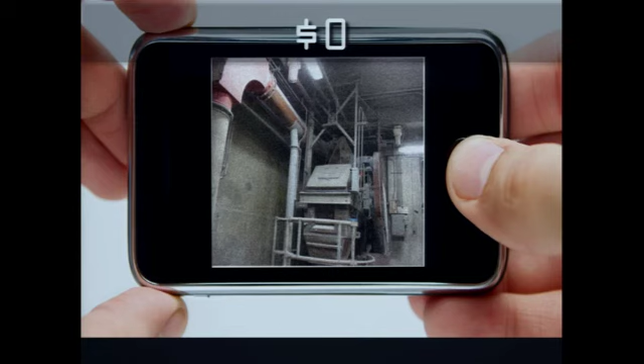This is interesting. This is a test we did on a mobile device, and most of you will think this is a photograph. Actually, no. This was point cloud data that we were able to generate from the phone, completely three-dimensional.

This is another one I captured with my iPhone. I was around Notre Dame and captured different angles, pictures of the church, and was able to render it automatically and have that kind of information.

So for us, that's what we call reality capture. Bringing things from physical to digital is very, very important for us.

We start seeing these devices because we wanted to go airborne, and make airborne very affordable. In fact, we built what we call UAS, drone systems. I took one of these drone systems to Africa, and we were flying over archaeological sites taking high-definition video.

And imagery, generating some topography from there, which was fascinating. You can see a clash of cultures, me wearing a traditional hat, and then we have this chief, a very nice guy, but he carried an AK-47 24 hours a day. So I was a little careful about that.

It was fascinating because every tribe we went to, we had to ask permission to fly this strange thing. This was one of the octocopters that we built.

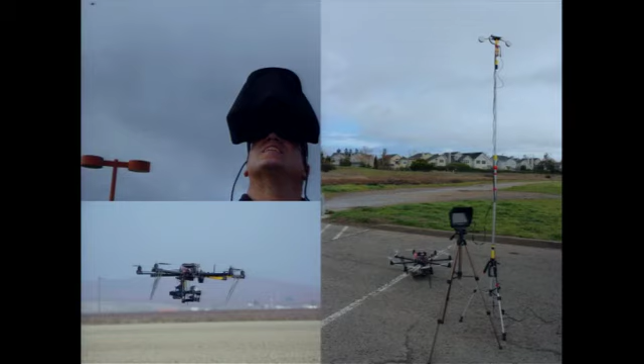We fly manually. We open a Google map, set up points, and send it on a mission to do the mission.

Or one of my favorite flights, what we call FPV, through these goggles that have full telemetry. I go to a distance of 1,000 meters, and I can capture and activate the octo to do whatever we want.

This is a flight path that I designed in front of our main building in Marin County. And it was interesting - from photographs, I was able to generate this geometry, completely three-dimensional.

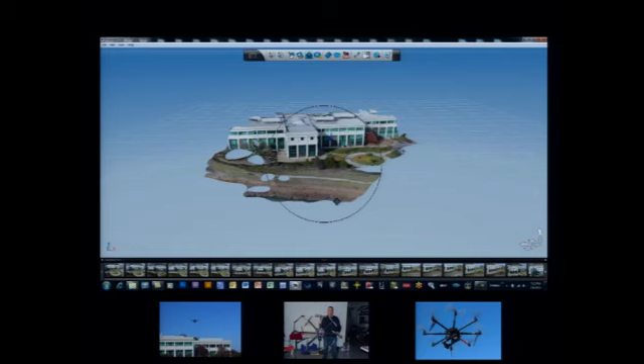Just from the images, I don't have to even tell the system where's the image. I just give it an array of images - in this case, 150 - and I say, from this array of images, compute me the three-dimensional model of this building itself.

But it goes beyond that. What we do with this data - how we analyze it, how we simulate the lighting, the air distribution.

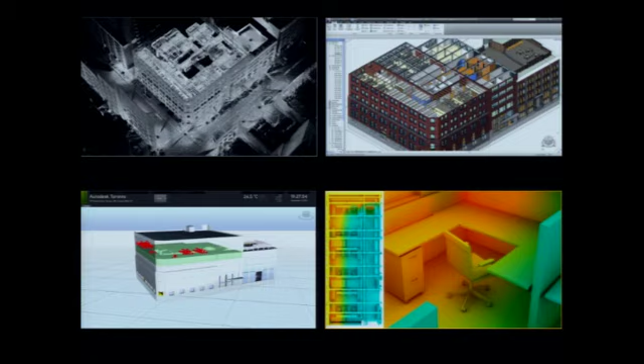And if you don't have the model, there are tools right now that allow you to capture the model and bring it to three-dimensional. Probably all of you know this famous actor - how we scan him, and for the movie Tron, we make him younger. All these tools are available on the software side.

So democratization of this device is very important for us, because it will allow so many people to do things they never thought they could do before.

Cloud data, very important for us. So we did reality capture, cloud data.

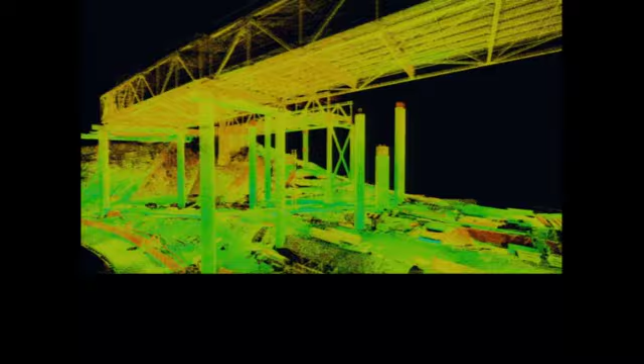Now we have to deal with a massive amount of data. And we are building the systems of the future to allow us to have this data, to access this data even from a mobile device, and do things with that data itself.

From the building information model, how I'm going to be using this survey data, and how all this data communicates to each other to either simulate, fabricate, or manage - and how all this data is working.

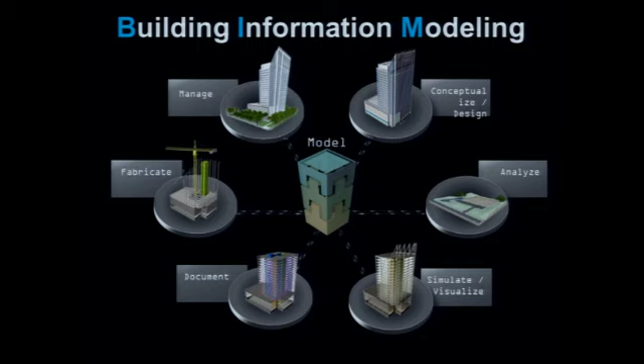We calculated a customer will typically use one processor. It will take 10,000 seconds and cost 25 cents, okay? Well, it's interesting how it scales, because we did the same thing using 10,000 processors, and in 1 second it was the same cost.

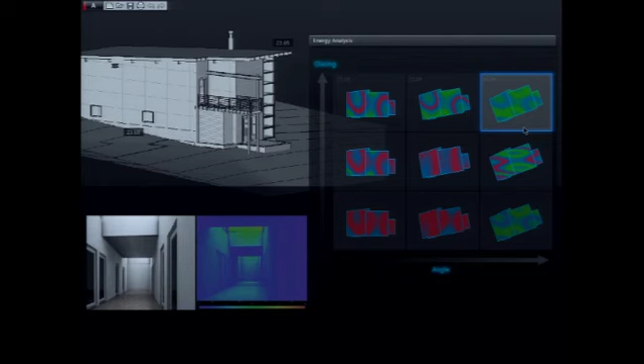Nowadays, a lot of the software from Autodesk does heavy computing on the cloud, bringing instant results, not only of the thing you were looking for, but also alternatives, instead of spending so much time having the system tell you some alternative. This is the case of computational evolution that we do.

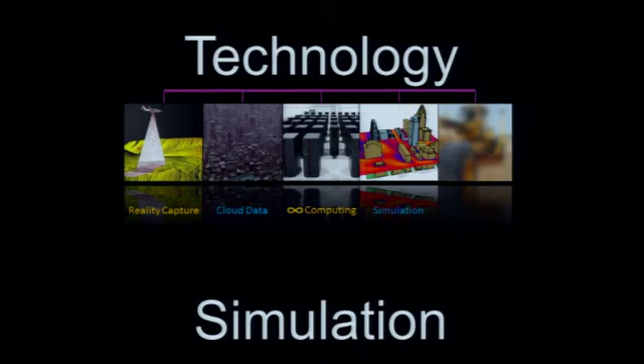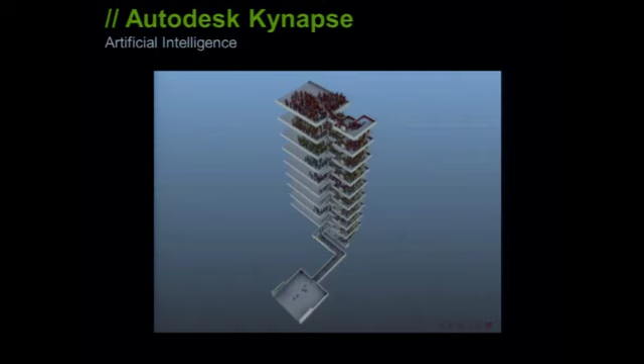Now, simulation, extremely important for us. How we simulate sound, how we simulate heat, lighting into a building, and the tools we are developing to do that. This is a case of a simulation of how people will leave this building in case of an emergency, and being able to calculate all these elements. This is a full simulation.

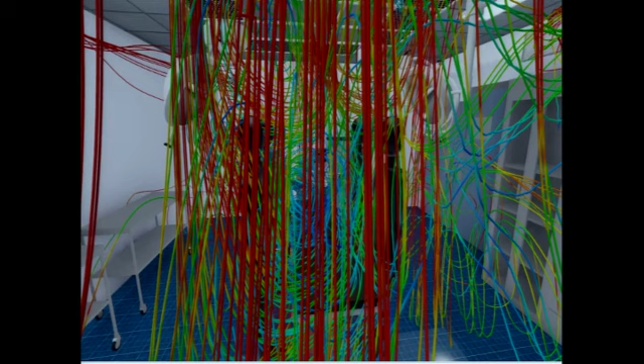This was an operation room, and they had a problem with organisms flying in this operation room. It was all because of the bad design of the venting system. So we went there, looked at the whole thing, looked exactly at the flaws that were happening, and we redesigned with them to get this kind of output.

All these tools — that's why it's so important, bringing from physical to digital, because in the digital world you can do so much. This is another simulation.

So simulation is very key, because before you guys build this element, you need to simulate.

Now, one of my favorite topics, which is digital to analog. We talked about physical to digital, now back from digital to physical, by different means of additive manufacturing, subtractive manufacturing, robotic, nanoscale, and bio. We're looking at every single level, making a lot of progress in our software to address all these technologies.

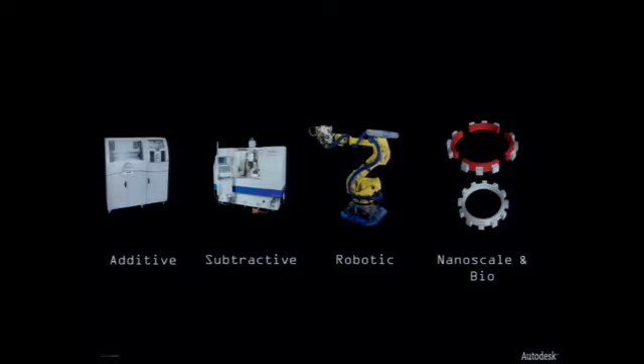It's interesting, because we talk so much about 3D printing — and by the way, we love 3D printing — but it's another method, one that will coexist with many other methods today. Some of the materials you guys can use in 3D printing, the famous word from Star Trek, the replicator.

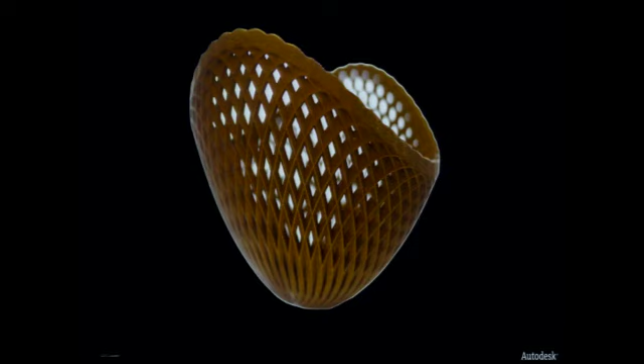This was a Nike shoe, fully 3D printed. Probably you guys have seen some of the fashions made possible by being able to 3D print as well. This is something we did with metal sintering, and it came out really nice. This actually is a design our CEO did himself.

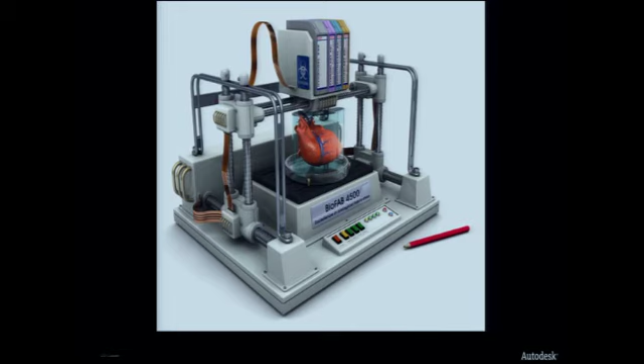And to go into larger scale as well, if you want to start printing at the building level, or even at the nanobiology level too — we are looking at all these technologies as it is.

Remember that movie, Apollo 13, 'Houston, we have a problem'? When it should be, 'Houston, we have a problem, send us the design because we're going to 3D print it here.' Okay, so that's very interesting stuff we've been looking at with the technology.

By the way, it was fascinating. It was absolutely fascinating. This is called a vomit comet, and I didn't vomit, which was great. But it was really interesting — actually, we printed a wrench, and we were able to do it.

I'm going to start printing my china — I'm not going to put anything hot there. Different elements we did at Autodesk, a lot of the samples you see in 3D printing — I'm going to make some here very fast to illustrate.

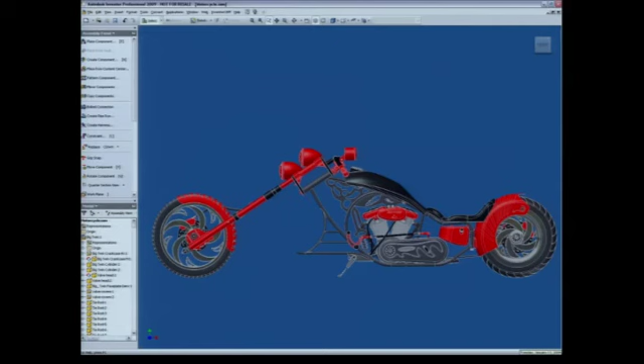A lot of them are small objects that have function, very complex to manufacture. So we decided to do something a little bit bigger as a test. We have this design of a motorcycle, fully 3D printed, and we did a full-size 3D print.

The interesting part is that we were able to simulate every piece so well that it was incredible. We had zero error when we printed. I had two months to finish this motorcycle, and it was done in five weeks. So we did the motorcycle as a first test of something a little bit bigger.

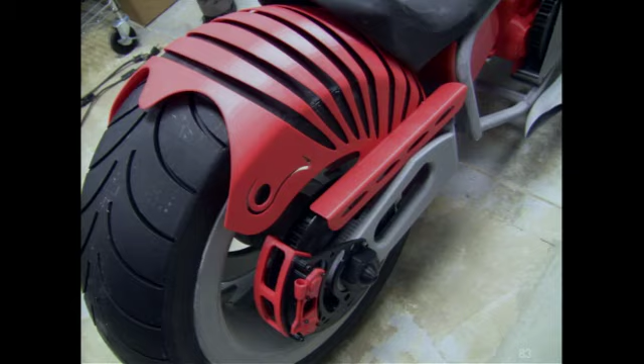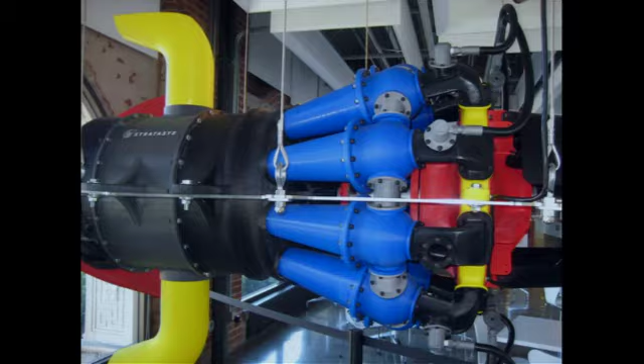The following year they asked me, can you do something bigger? So we got this design and 3D printed pretty much a full-size turboprop jet engine. We have all the planetary gears connected with the electric motor, and when we turn the motor, you can see the props working and acting like they're supposed to.

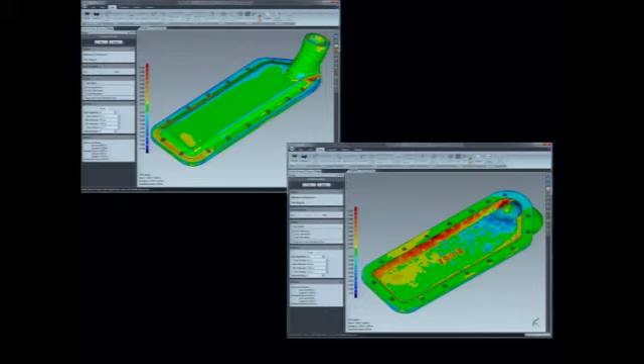We did a process working with Jay Leno on some very old parts of his cars that he couldn't find anymore. We went out there, scanned the part, got its shape, removed the rust, generated a three-dimensional model of it, and 3D printed a part that works. All these technologies are quite remarkable.

How you converge all this data together is very important. Reality capture, cloud data, infinite computing, simulation, digital-to-analog fabrication, these are things we're looking at, and how all these technologies connect together. For us, on the technology side, we're looking at disruption, how to create some of that disruption. Scale, from nano to global, is very important, how we address those things.

Data discipline and building information modeling are very important for us. Most important is to democratize these technologies, to make them available and very inexpensive to use. And sometimes you need to look at the impractical to get great benefit. So that's pretty much it for myself. I hope I did less than ten minutes.

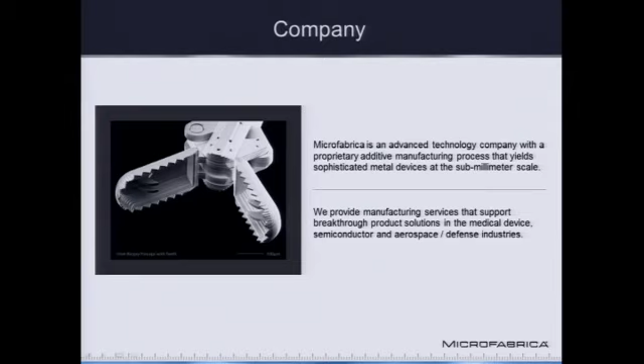We're probably more similar to what Chris presented earlier from Lawrence Livermore. We don't really print the parts, we electroplate the parts. We grow them additively through electroplating.

So we provide manufacturing services that support product solutions in a couple different markets: the semiconductor market, aerospace, defense, and finally medical. We really see the medical market being a very large market for micro mechanisms, micro devices.

A little bit more about our history. We were founded in 1999, and we spun off of USC in 2001. We have a 40,000 square foot facility in Van Nuys, Southern California, and our founder and president both were actually from 3D Systems, so that might explain why we have some of our roots in additive manufacturing.

The process that we have is called MICA Freeform. It's a little bit different than 3D printing. So first, how is it the same? We could build 3D objects with layers from a digital model. We receive a digital model, and we could grow this three-dimensional shape. This allows for complex shapes and also eliminates assembly. These are some of the aspects we've been hearing all day about—what are some advantages of additive manufacturing. That's how we're very similar.

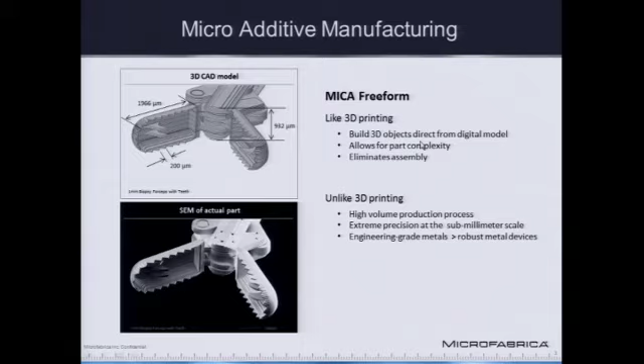So next, I want to show you a video. This is my only multimedia part of my presentation, which will give you an idea of how we build these parts up. We build them on what we call a wafer, and we can build multiple parts, many parts, all in batch.

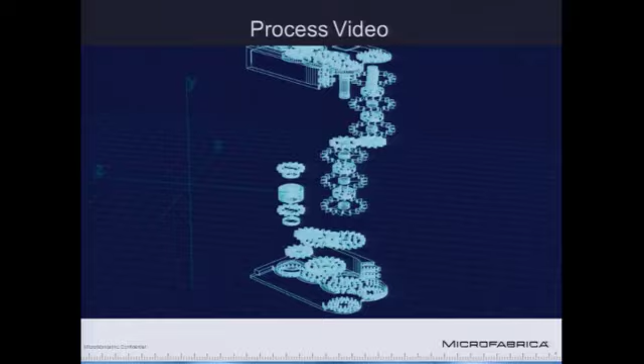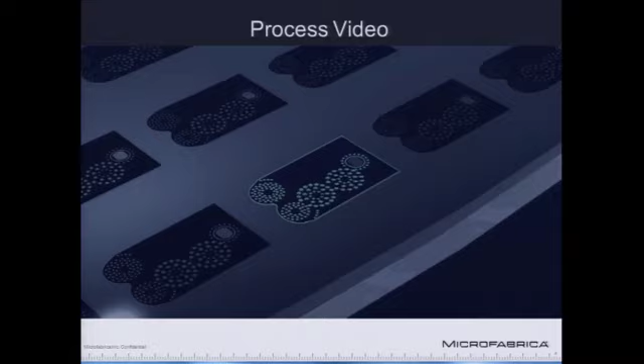This extraordinary process begins with a 3D CAD model. Using proprietary software, the model is divided into layers, allowing photo masks to be generated to sub-micron accuracy, with hundreds to even thousands of devices fitting on a single ceramic wafer.

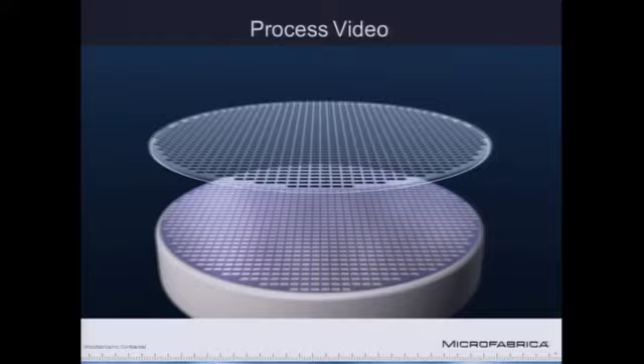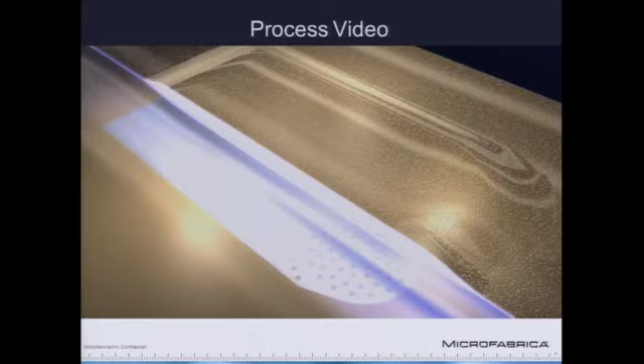A custom photolithography process defines a pattern where the first layer of structural metal is deposited at the atomic level through electrodeposition. The photoresist is then dissolved, and sacrificial metal is deposited over the structural material. The surface is then planarized to a consistent uniform thickness, within a tolerance of 2 microns.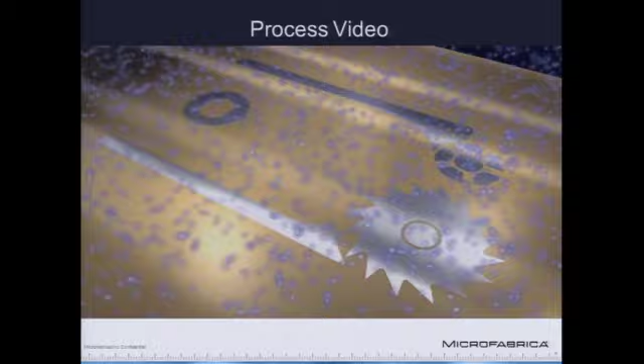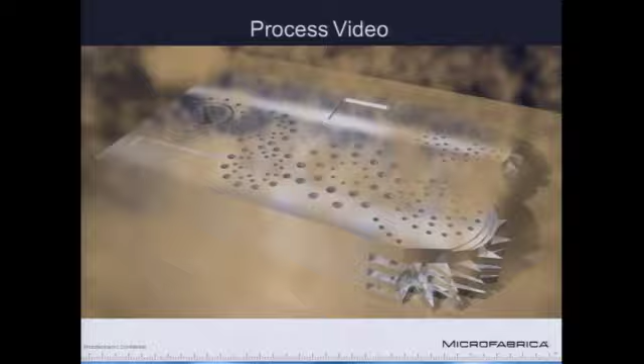The process is repeated for each layer in the design until all the layers are completed. The sacrificial metal is then extracted through a chemical etching process, simultaneously enabling movement of each mechanism while releasing the device from the wafer. High-performance micro machines.

If you have any questions about the actual process, I'd be happy to answer them either after the presentation or maybe during the break.

But now I want to go through just a few applications of some of the things that we are doing with our customers today.

The first application is semiconductor. In the semiconductor industry, we call it wafer test probe—micro contacts, micro needles that touch down on IC chips, Intel chips, Samsung, your flash chips, and make electrical connection to test those parts while it's still in the wafer format. We actually work with a local company here called Form Factor, and they're in this industry.

So what are some of the challenges of this? The industry, with Moore's law, all the chips are getting smaller and smaller, so are the pads on those chips. The pitch on those pads is getting smaller and smaller, and they need to touch down on all those pads to make electrical contact. So these needles are getting, in the same way, very, very small—less than 80 microns in diameter, going to probably less than 50 microns in diameter. And at that point, precision is really, really key.

Every micron counts. So there's this move to smaller dimensions, but then there's also a need for higher power—they want more conductivity, more current to go through these microneedles. In the same way, they still need high reliability. These little micro springs, they look like eyelashes, cycle over 1 million cycles. So our solution—we've been able to make this micro composite device. It looks like a simple little wire.

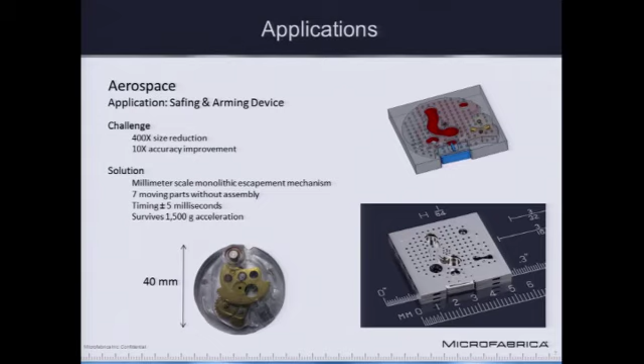For us, this is a really good application. And again, there's really no way to make this with any other conventional technology except for an additive manufacturing process.

Now, the last thing I want to talk about, which is probably the biggest growing area we think in additive manufacturing, is in the medical industry. This is one example of one of the things that we're making and working with a medical company on. This is a micro tissue removal device.

What you see on the upper right, this tip is about 2 millimeters in diameter, and it fits on the end of a handpiece that looks like a pencil. So you can imagine on the end of this pencil there's this micro debrider, micro tissue removal device.

What are the challenges? We want to make this remove material at a very high rate. It's going to be front cutting, and if you're in the industry, most of these devices that remove material are side cutting - rarely is there a device that actually cuts from the front. And then also reducing this tip size to 2 millimeters and potentially smaller.

One of the applications is tumor resection in the neurovascular area in your brain, being able to selectively remove material without damaging material on the side.

So what we've been able to do is take this concept, which was really born out of a paper shredder or a tire shredder - take these macroscopic ideas and shrink them down, because previously you wouldn't be able to make something like that on that size.

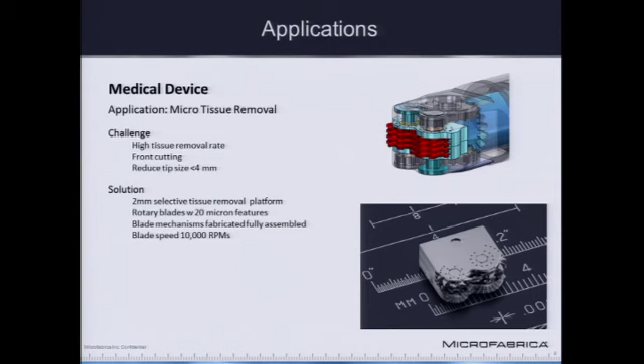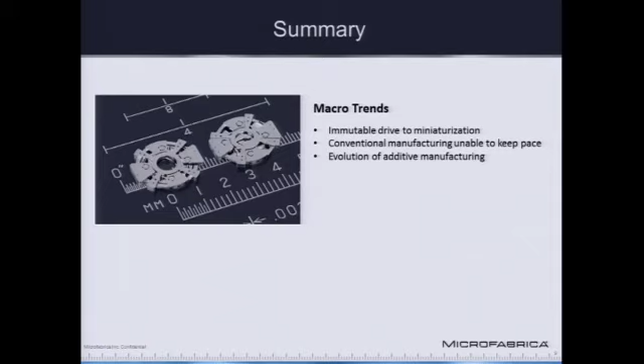So the last thing, I'm just going to conclude on this slide. Really, the macro trends that we're seeing, there's this drive to miniaturization in a lot of different areas - as I mentioned, semiconductor to aerospace defense, and what we think is really a big area going forward is going to be medical. Conventional machining, traditional machining technologies, is really running out of steam.

One of the models we like to bring up is: is it impossible to machine? If it's impossible to machine, you have to use an additive process to build up to achieve that type of complexity or precision. This is why we think a lot of industries in the microscopic world are starting to migrate toward additive manufacturing. So that concludes my presentation, thank you all.

Thank you very much, I thought that was very exciting. I'm reminded of a couple of things as Rich took us through that fantastic overview, and that is that manufacturing, as we all know, drives 90% of private R&D dollars, so that's very important for the United States. And manufacturing, as we should know from the McKinsey report that came out in November - I'd like everybody to download that and read it, it's very fascinating - drives 70% of trade or export, so it's very important.

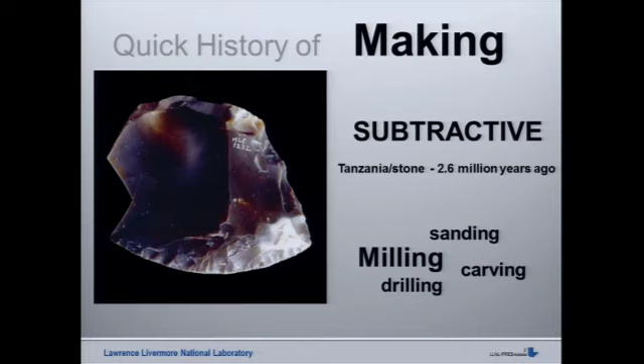So if you look at our species, we first started making objects around 2.6 million years ago, based on flint tools found in regions of Africa, which indicate a subtractive form of manufacturing where people were chipping at stones, removing material to create an object. This stepped up a gear about 78,000 years ago when people started using fire to splinter and crack and change rocks. Ultimately, subtractive - CNC machining, drilling, carving, sanding, cutting, chopping, anything in a lathe, any process where you remove material to create an object - is what we fundamentally call subtractive manufacturing.

The second form is formative. Again, our species, about maybe 8,000 years ago in Mesopotamia, melted copper or bronze - there's some debate. And the oldest object ever found that's been cast is actually an ornament, like a little frog, which is quite interesting, not an axe head. You kind of see a lot of frogs on Thingiverse and Maker and stuff again - it's kind of cool to see we're back to making little ornaments. Ultimately that led to the Iron Age and all these different technologies for melting, forming, casting, taking clay and squeezing it, melting glass and pressing it into cavities to create objects, blow molding, rotational molding. Again, these are all tools in a toolbox - if you're tasked with making something, you look in your toolbox and think, what's the most efficient, cost-effective way to solve the problem?

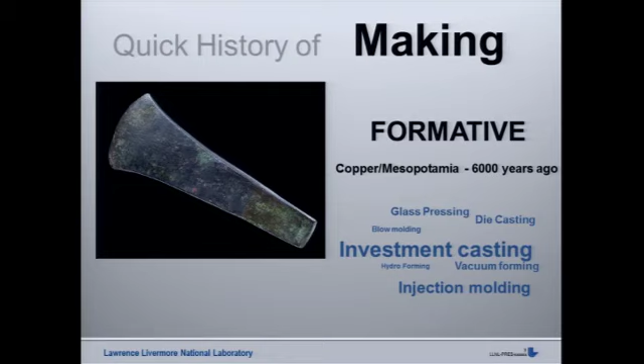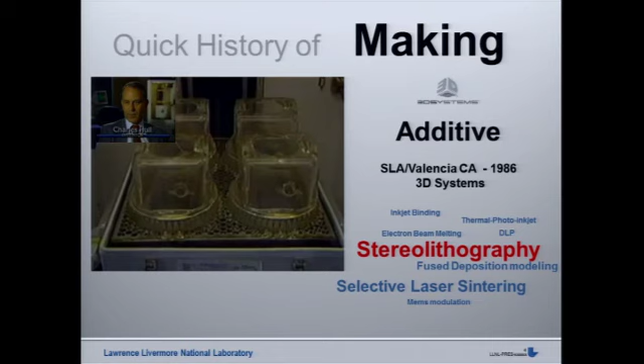And the third form of making was actually invented in California in 1986 - just to put it in context - with the development of stereolithography by Chuck Hull, who came from a UV photopolymer background. That led to all these different ways of building objects by sticking layers or voxels together. Today you have many different versions and techniques, including selective laser sintering, fused deposition modeling, MEMS modulation of light using DLP or pass-through, electron beam melting to get very dense, fully dense properties, inkjet binding, thermophoto inkjet, a whole bunch of different ways. What I said to Scott Summit earlier - it would be interesting if in millions of years they dig in Valencia and find an ultraviolet laser or something, and it could be the first representation of additive manufacturing.

So just a little bit of a focus on the technology. SLA was the first technology, and just because it's the first doesn't mean it's become obsolete. SLA and SLS, both vector-based additive technologies, are still the industrial workhorse of the layer additive manufacturing industry.

If you go out there and evaluate companies that are producing 100,000 objects a day, and they do exist at this point—a lot of it's below the surface and confidential—you'll find that the workhorses of those companies, and the service bureau industry, are the stereolithography system and the selective laser sintering system.

The reason for that is lowest cost of production. If you make a part hollow, the liquid stays in the vat. Other printing technologies fill that hollow void with support material, which is expensive. There's also compatibility with post-processing—you can take a tray off a machine, put it through a conveyor belt, through dishwashers. You don't need labor scrubbing and cleaning parts.

Extremely high definition, very high throughput. It's vector-based, but you're moving a vector at tens of meters per second. You're not mechanically moving it nor extruding it. There's a very broad range of materials, everything from ceramic-loaded resins to transparent resins to biocompatible resins.

There is full SPC coming out of systems now so people can integrate them into manufacturing. Very high quality surface, minimum finishing, and instant turnaround. It's a non-thermal, non-contact, buoyant process. So a build finishes within a minute, and you can be building another part right away.

SLS is the melting of powdered materials—a whole range of materials, ranging from nylons, different grades of nylons, to glass-filled nylons. Very good accuracy and definition, high system consistency, and tough mechanical properties, not just in X and Y, but in Z.

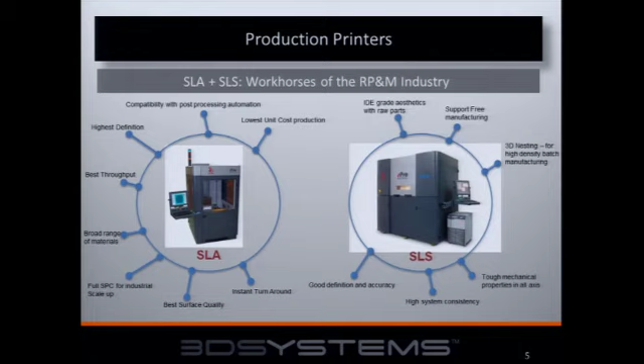If you look at any of the websites selling lampshades and jewelry, like Nervous System or MGX, everybody gravitates towards selective laser sintering because the layers are almost invisible, the mechanical properties are very consistent, and the sidewall looks like the top surface, looks like the bottom surface.

Again, just looking at materials—a whole range. I'm not going to go into the full list, but everything from class 6 biocompatible materials for making hearing aids, drill guides for dental implant placement, thermoplastic replicators, ceramics for high temperatures, compatibility with RTV which is very important for preventing inhibition of silicones. And for SLS, we have flame retardants, high impact strength composites, glass fibers, and elastomerics—not like a lot of the elastomerics in other systems which are just low durometer gels.

They're not really elastic—if you make a gasket and squeeze it and release the pressure, it remains compressed because it's a yielding gel. We also have biocompatible materials and other plastics.

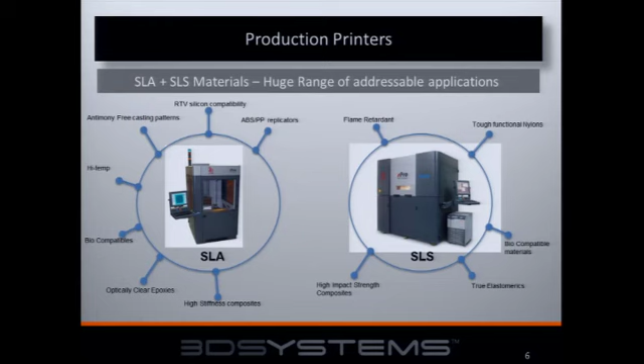Some examples of mass custom manufacturing, which is very different from low volume manufacturing: you have gigabytes of data flowing in, kilograms of powder flowing in, and then units of product shipping out. It's largely logistics—I've always said it's 15% technology, 85% logistics, because if anything breaks, it's like a car crash or pile-up on a freeway. Some of the companies doing this now—3M is manufacturing all its prosthodontic models.

There are 300,000 people walking around right now with crowns manufactured on dental models made using stereolithography. Siemens hearing aids, and all the hearing aid companies—about 96% of all hearing aids in the world, custom hearing aids, are manufactured using stereolithography. Somewhere we're seeing a lot of traction right now is patient-specific surgical instrumentation.

This enables surgeons to create the perfect cuts in bone in order to place an implant that fits like a jigsaw puzzle piece. So the patient is open for a very short period of time, you get very rapid osseointegration, and a very short duration of physiotherapy because the perfect implant is placed.

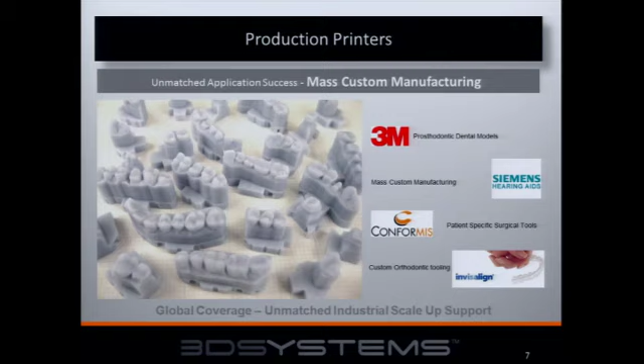Obviously, custom orthodontics as well. Some of these operations are making up to 75,000 custom one-offs per day, in facilities that look more like factories as opposed to just labs with single little machines.

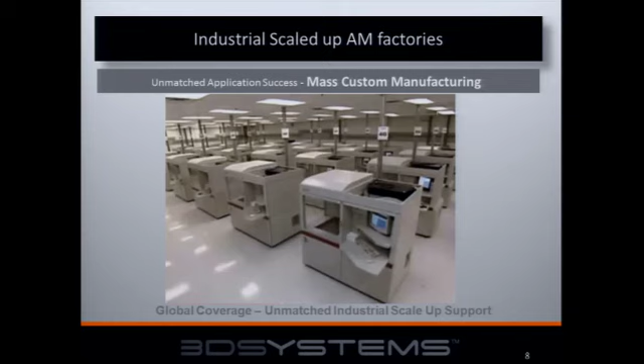So just a quick snapshot of an example of a mass custom manufacturing facility that's happening right now—it's not theoretical, not in the future. There are millions of products being produced using layer additive manufacturing.

There are also very large systems—this is a single piece dashboard. If you go to any of the automotive shows, the cars you see in Detroit or in Switzerland are always, these days, made using layer additive 3D printers, because you can convert a CAD file into a physical object very quickly and very accurately. Also used for quick casting patterns.

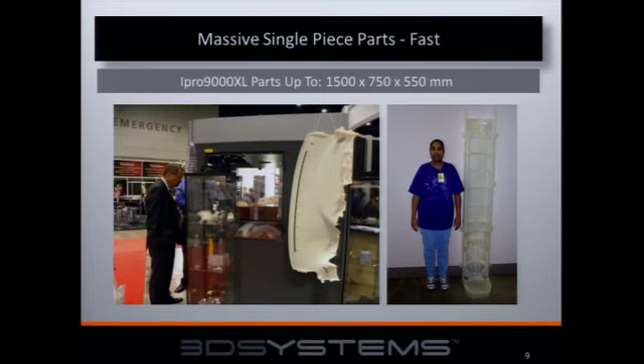Some folks mentioned that 3D doesn't do metals. We're the largest supplier of metal components from rapid prototyping workflows in the world. We don't believe in directly making metals. We believe in producing printers that produce wax, so we can give it to a casting or foundry guy who can then come back to you with an alloy in any metal you want that's certified and representative of what has always been used in, for example, aerospace programs. We also build very large components on very large systems.

While still preserving detail, you see that dashboard - if you zoom in on it, it could be covered in little pins like this. The correlation between cost and complexity is very, very low with three-dimensional printing. That's one of the main advantages of it over subtractive, where you have to express every feature with a vector.

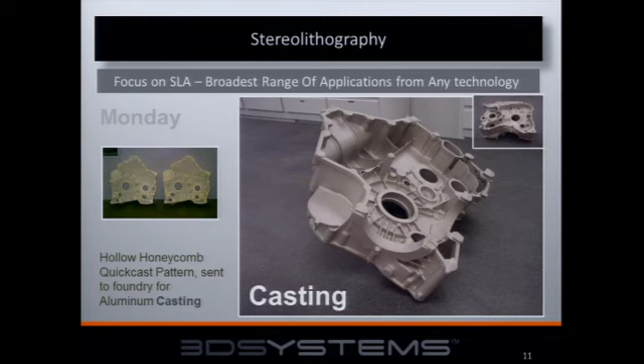Again, casting, aluminum, titanium - anybody who works in aerospace, automotive, where you need to either make a prototype metal component or low volume. If you look at Formula One, motorsports, if you look at UCAV, it's low volumes of complex components with extremely high complexity. It's very hard to justify tooling. So you can build a pattern, give it to a foundry, and they'll cast it in any alloy from titanium to aluminum. Again, Scott showed a slide of ceramics from a stereolithography system.

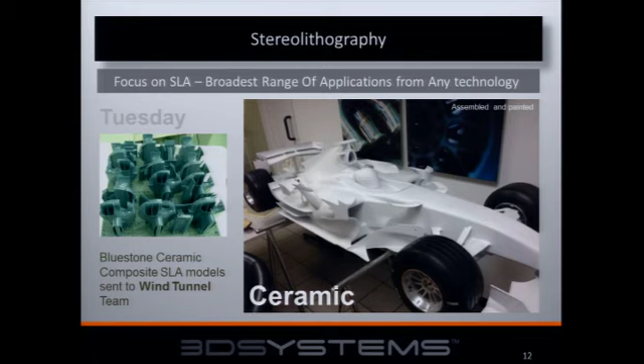You know, feeding that wind tunnel, so you don't have to turn off the wind tunnel. You can actually build a product faster than you can think of ideas. So the bottleneck is no longer converting the idea into a physical object for feeding that wind tunnel. So you get better utilization out of your wind tunnel.

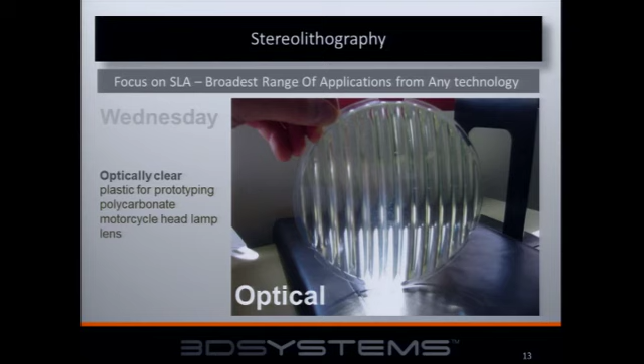Optical clear resins - this is all from the same machine. So on a Monday you could do a casting pattern, on Tuesday you could do ceramic, Wednesday you could do an optically clear prototype for the headlamp of a concept car. On Thursday you could put in a tough functional plastic and create a replica of what your injection molding is going to look like. And on Friday you could make some hearing aids that are biocompatible for sustained skin contact.

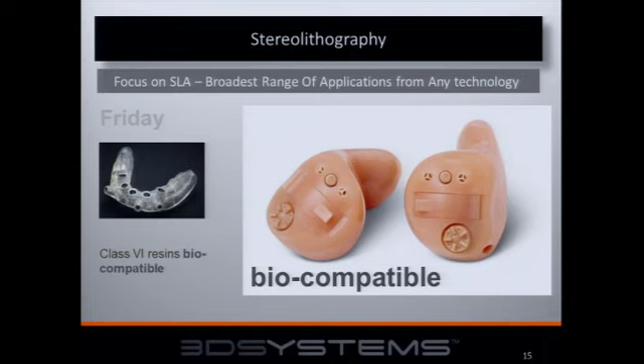You can make drill guides that surgeons can use to drill into bone and accurately place implants in the perfect position, not hitting the nerve, pre-designed using CAT scan or X-ray information. Again, that kind of shows the range of applications from a stereolithography system. It's like a Swiss Army knife. If you have one within your company, there's a whole range of different departments and projects and programs that you can address with the technology.

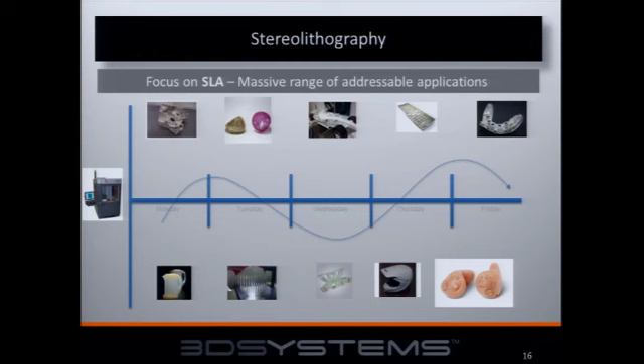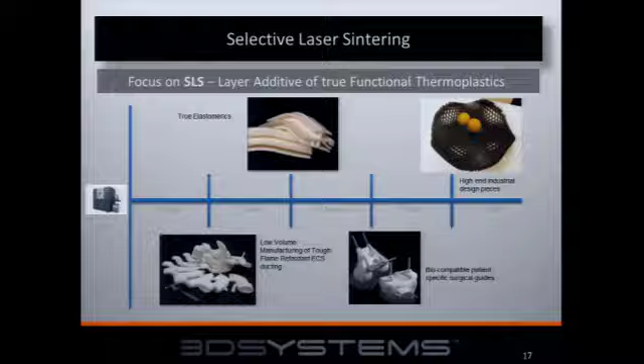True elastomerics like gaskets, seals, patient-specific instrumentation for drilling, cutting, removing pieces of bone, and obviously high-end industrial design, which is one of the more recent developments - designers designing for three-dimensional printing and creating very interesting aesthetics.

Here's the real-world application. Again, this was Renault Formula One at the time, and they needed 6 electronic enclosures for the car, very similar to some of the aerospace programs where you only need a very low volume. So this is not mass custom manufacturing. This is low volume manufacturing, where the cost of tooling, the lead time for tooling is excessive. So why bother? Just let the CAD be your injection molding tool. Put it into a computer, on-demand manufacture it, bolt it onto the car.

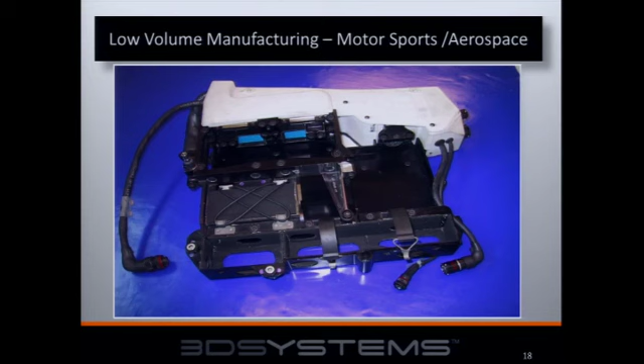Again, very light, complex nylon, tough nylon components. You see a lot of this under General Atomics, Boeing, Lockheed, all the different aerospace companies. High-end industrial design, I think we pretty much covered that.

Again, someone mentioned the International Space Station. We have over 1,200 components on the International Space Station made from plastics made in our machines. In this case, it's a glass reinforced nylon and then a pure nylon 11. And I believe these may have been made by Rocketdyne in 98, 99.

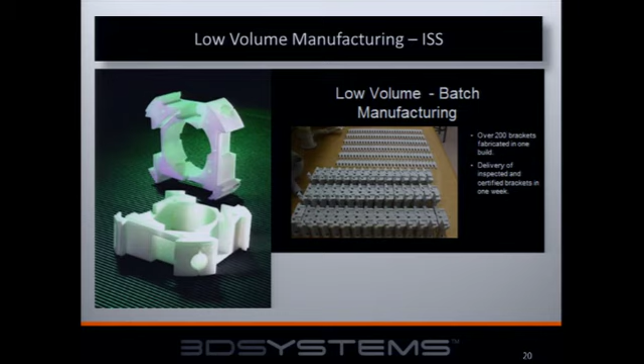So just to close the loop there - the design was done on a Monday. The part manufacturing was done on a Friday. Certification was the following week, and they were sent up within about a month from CAD file to physical part. Very, very lightweight, hollow internal structures, so high strength to weight ratio. Complex ducting, again, a really good application because of a lot of complexity, very difficult to manufacture trapped space using conventional manufacturing.

So again, moving air, electronic cooling ducts in this particular case for Formula One. Formula One and jet fighters have exactly the same requirements: very expensive, the demand for lightweight, lots of design iteration, very low volumes. So it's a great tool for manufacturing in that particular area.

We have full color printing. On the consumer end, the Z printer, many of you probably already have this, but we're jetting ink onto cross sections.

It's a project we did in Germany last week where we custom printed 200 people's faces at a trade show on the booth, scanning and printing and handing them USB keys with their faces real time. And it was interesting to actually do it and be confronted by some of the challenges associated with managing the logistics.

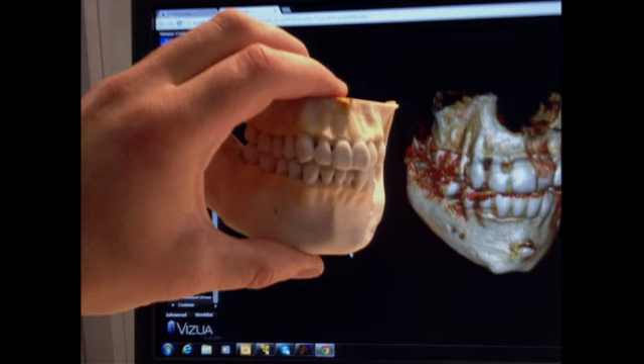Color CAT scans, a bunch of companies are artificially assigning pigment based on density or blood richness. What you get is 3D models for diagnostics and for being able to study and understand exactly what's going on. For example, if there's a complicated bone tumor, being able to see it. By artificially applying color, you bring in that extra dimension of visualization.

Just to close on the Cube printer, I have an 8-year-old son, and I brought the Cube printer home. I was training him how to use AutoCAD and Rhino to create very simple geometries, and I couldn't get him to stick with it. After playing on a computer for 3 or 4 hours, he'd have a little 3-dimensional object on the screen that he would rotate and render. But after a few weeks, he got bored of it and went back to playing video games, not really interested in the 3D CAD.

As soon as I brought home a 3D printer and plugged it into the laptop, 3 hours later he had a physical representation of his idea, and it just clicked. Instantly he was completely back engaged. Giving somebody a reward or something tangible for that creative effort of interacting with a CAD package is very powerful. That's one of the reasons why we're doing the Cube and the consumer printers: if we sell 10,000 printers, there's 10,000 people out there who now expect they can get a physical object within hours of having an idea. That's intoxicating. You can't go back to the world of waiting a month for your prototype once that timeline is elevated.

Okay, so that pretty much concludes it. I have some parts if anyone wants to check them out.